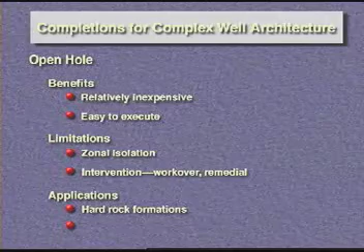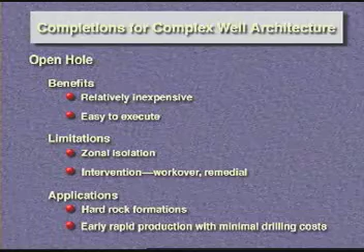Open-hole completions should be viewed as disposable, that is, intended for early rapid production without regard to future problems. They may be particularly attractive where drilling costs are minimal or early production is large.

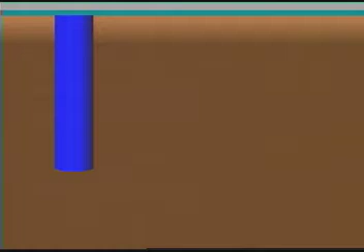An open-hole completion starts with a vertical trunk drilled to a point above the target. Laterals are then kicked off from the bottom up, through windows successively milled through the cased parent hole. The laterals, because they are open holes, can be short radius and can target relatively small geological flow units.

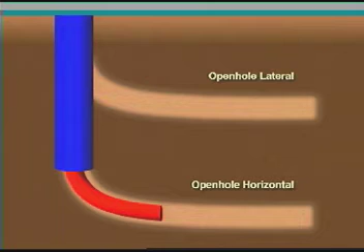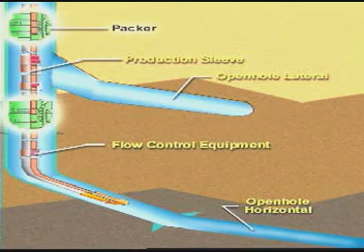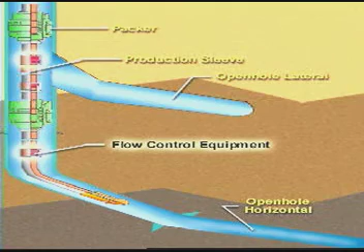In their simplest form, open-hole multilaterals are connected to the parent hole without any provision for shutoff or isolation. One way to isolate zones in an open-hole completion is to install production packers above and below each exit window and tubing strings to allow production without commingling. Access sleeves and sliding sleeves allow for through tubing access for selective intervention, or for shutoff in case problems emerge.

In cementing a lateral, or at least the curved section of the well, which has frequently been the location of wellbore collapse, the first consideration is lateral hole size. Although slim hole cementing has been tried in some cases, laterals to be cemented are generally of larger diameter.

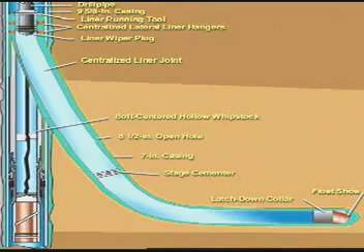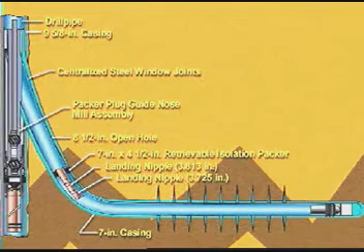7 inches is typical. The liner string consists of a float, 150 to 300 feet of casing extended into the parent hole, and a liner hanger. Once cemented, the string can be selectively perforated. As with open-hole completions, several multilaterals can be installed in this manner.

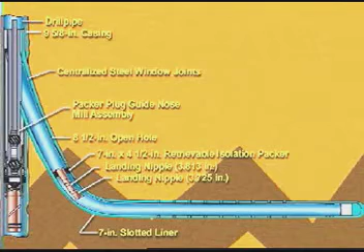As an alternative, and in a similar manner, slotted liners can be installed. This is appropriate when zonal isolation is not critical.

More advanced well completion technologies include the Level 5, which allows full hydraulic isolation of the junction between the vertical trunk and the lateral. The level number refers to rankings established by an industry Technology Advancement Multilateral, or TAML, forum.

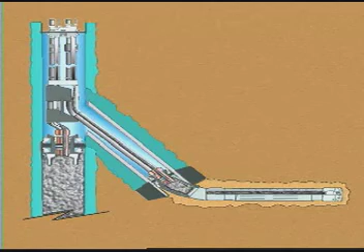In this configuration, a lateral entry nipple allows production isolation and through tubing re-entry capability in either lateral. Production can be commingled or, as